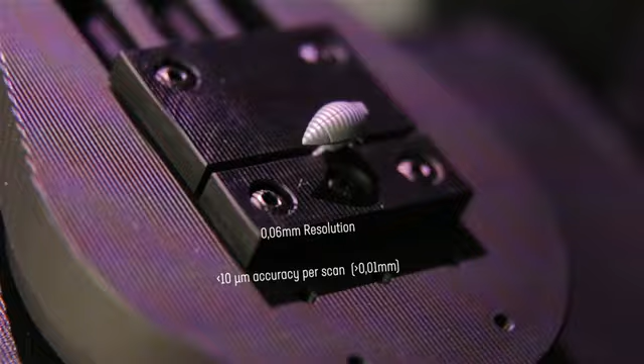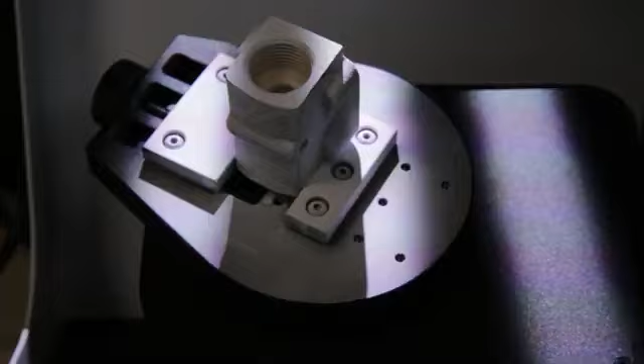So this scanner and most other 3D scanners work by having two cameras and a projector. The projector will project a light on the object, a really tiny pattern, and two cameras will see that pattern and create a depth image.

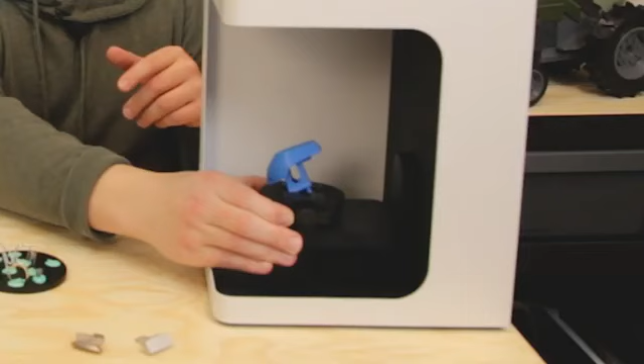If you want to know more about how that works, I have an article written down below that I'm going to link to if you want to read up on exactly how a 3D scanner works. But basically it creates a depth image from one side of the object, and what's really unique about this machine is that it rotates the object for you. So it can rotate the object in two axes, which really helps to cover the whole area of the scan, minimizing the amount of matching and work you have to do around it.

So it's a really easy scanner, usability wise, at least on the hardware. But if we start to talk a little bit about the software, I'm going to show you all the steps on this scanner. You can check out the timeline down below if you want to jump ahead a little bit. But we're going to start off with the software.

As of January 2021, when I'm recording this, the software is not really super good. It has all the features that you need, but they are not really well explained, and the flow of the scanning can be quite difficult to understand. There aren't really any good guides. You get this paper and there's a PDF with the flow, but it's not really good enough, so I'm going to show you the complete flow.

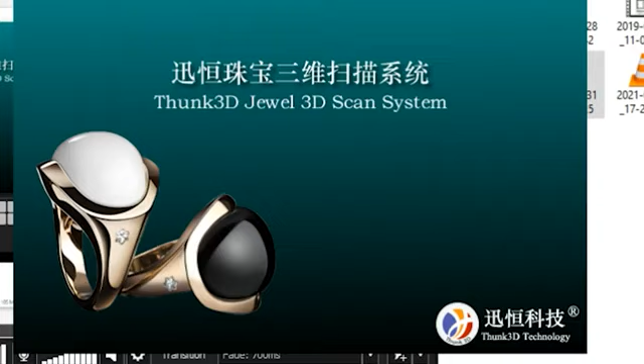So the first thing you do when you start up the software is to turn on the power button. When you then actually turn on the software, the scanner will home itself, so it will zero out any axis. In the software, you see we have a full menu up here. It's very confusing, or it could be.

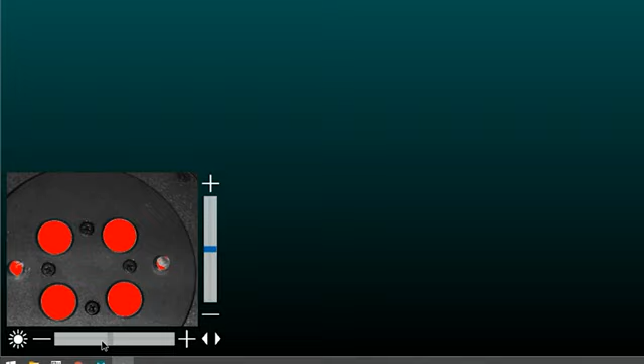On the left, you have a preview of one of the cameras. You can see my fingers there. Down here we have exposure, the camera exposure, which we will use a lot. You can see if I change that, everything will get brighter, and everything that's red is overexposed. On the right side, we have a height of our cutout plane. We'll explain that a bit later on.

On top, you have new project, calibrate, and settings. In settings, these are basically the mesh settings, so not much to do here. We can change all of these as soon as we do anything. Lastly, you have help, and yeah, you can find some information there, but that doesn't really say a lot.

Okay, so the first thing you want to do when you start up the software, and basically whenever you want to scan, I would recommend that you always do a calibration. So you click on that and you have to put in your calibration plate. I'm guessing mine is 5mm, pretty sure it is. And then you put your calibration plate inside the machine. It has these magnets, so it will only lock into one position, like so.

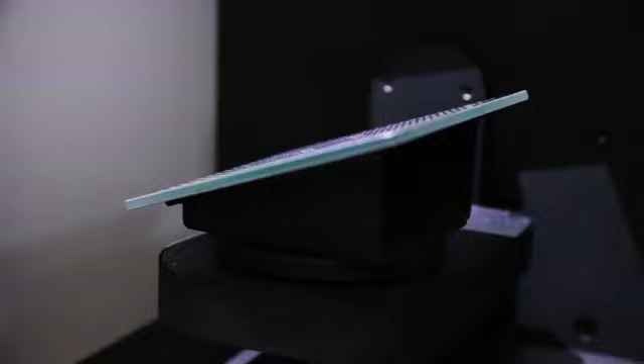Right now the projector is not lit, that's why we're not really seeing this. But as soon as we click apply on calibration, the scanner will look at these patterns. You can see these crosses, so it detects every motion, which means it's tracking its motors, verifying that the cameras are looking and focusing on the same points, and that basically all the math is correct. And then we're done.

So we can see our accuracy value, 0.01 millimeters. It's even more extreme than that.

Then we can choose HD scan or fast scan. Basically, this is how much data you're getting. So maybe you want to do a fast scan to see that you can reach all the areas, but I would always go for an HD scan, I think that's much better. Then when we're done with that, before you click continue, we'll have to name it to something.

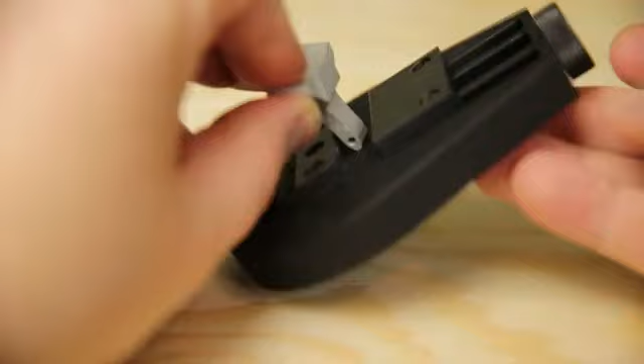Let's go with test. So after removing the calibration plate, you of course have to secure your part before we can click continue. So basically get your part in and make sure that it's secured correctly. When you're happy with that, you have to check the exposure.

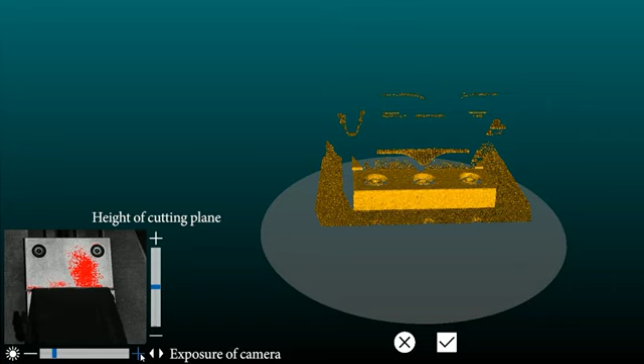As you can see here, it's very sensitive and very good for light objects. As soon as you want to start scanning darker objects, you have to adjust the exposure on the left side. The thing is, the darker you scan, the more noise you'll get from the camera, so try to always use something bright or scan something bright.

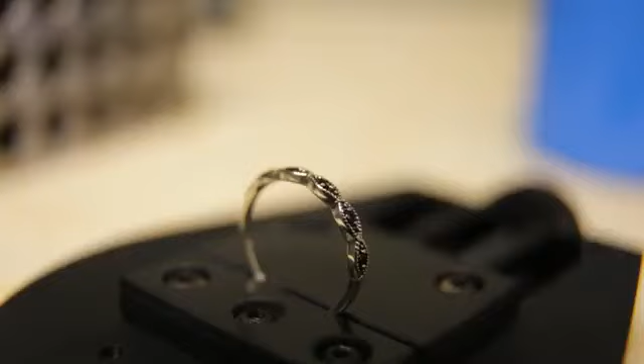You can always use a contrast spray like this AESUB spray. I have those linked down below as well, but this scanner is so accurate that you can actually detect the spray. So if you have some super exact items and spray this on, you're going to get a tiny filler effect. So if you have tiny details and want to scan them, the spray will actually work as a filler, which is not what you want.

So when you then click scan, the scanner will do a pre-programmed path. It's going to rotate in two axes, trying to figure out all the best positions to scan and get as much data as possible. Usually it does a really good job of this, but sometimes you can feel like there are areas where you want to fill in a little extra. This scanner also fills any holes, so the more you can fill in yourself, the better it's going to be in later stages.

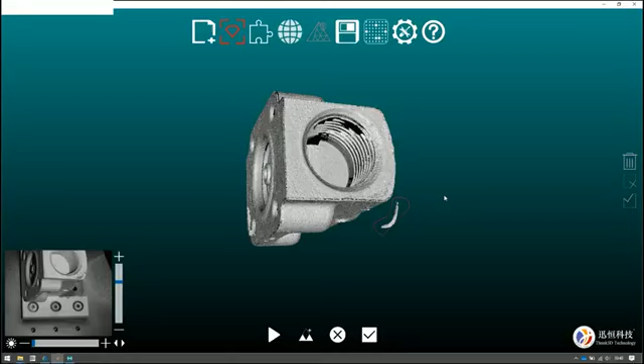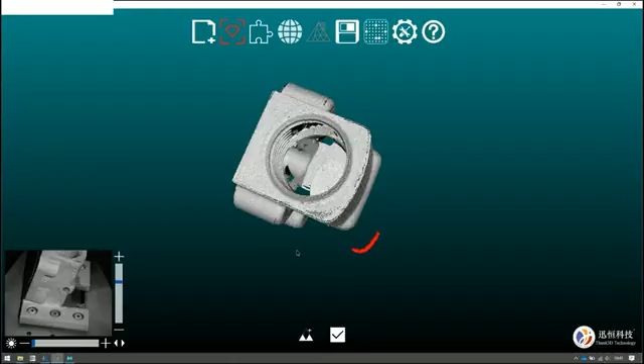What's really cool with this scanner compared to a lot of different scanners is that you can actually click on this button that lets you add a scan, and when you do that, it will actually lock the camera around your 3D object. So when we're looking inside the software, figuring out what angle we want to see more from, the software will actually track that back to the camera movement. So if I click add scan from this camera angle, it will move the object to the corresponding angle for the cameras and the object in the real world, and actually scan from that angle.

This means it's super easy for you to figure out what areas are missing data, then zoom in on those and add a scan. You can keep adding scans until you're happy, and then when you finish off, it will register a bit, doing some thinking behind the scenes to figure out exactly all the images.

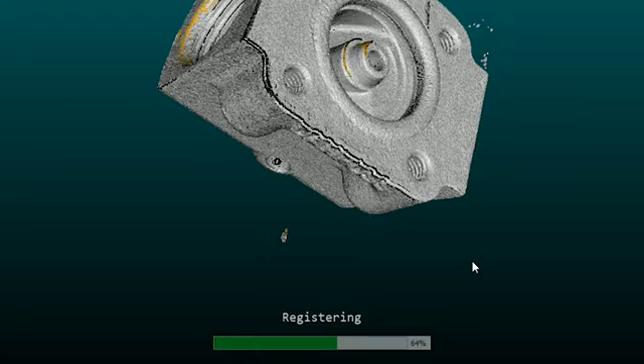What you want to do next is really important, and that's to remove anything you don't want. So you're just going to use a lasso tool to remove the mesh. Because then, if you want, you can add a different scan, for example turning the object around. That really works well if you have something unique and trackable, not something that's symmetrical—like a ring can be very difficult to turn around.

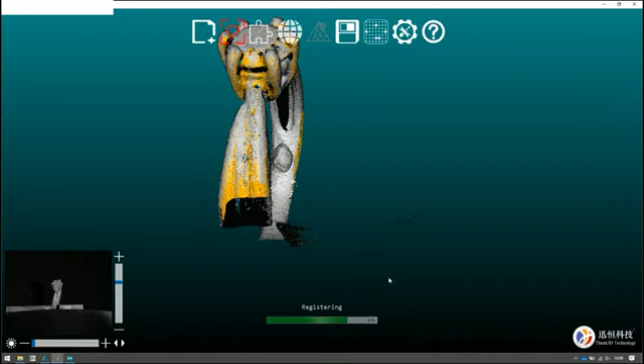You can see on one of these rings I've added a little bit of clay to make sure I know which side is which. So if you want to turn your model around, all you have to do is scan as regular, check out your model, add some scans if you need to, and remove any unwanted mesh.

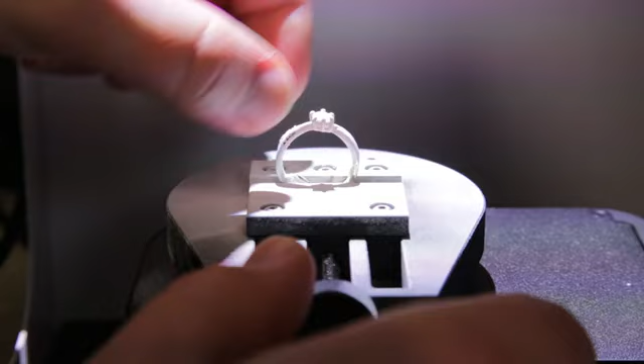Then you have to turn the physical ring around, of course. It can be quite tricky, especially with coated metals. You can see that the ring loses its powder a bit.

Then you do another scan, you just click continue scan. It's all sped up here to save some time. And of course, remove any unwanted mesh that you don't want.

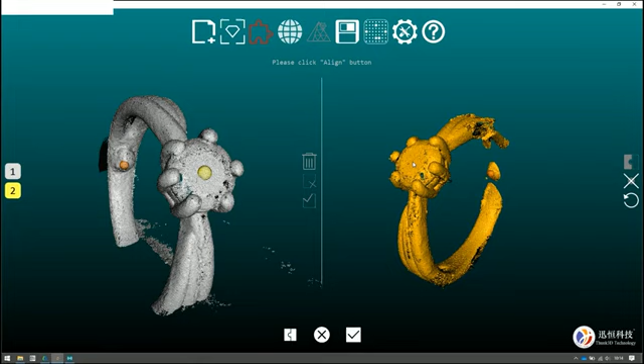In this phase, you will have two different scans, and then you match them up with different points. You can see I'm clicking out orange points, yellow points, and there should be a green point as well. Basically, you align these points, and the computer will help you find alignment. As you can see here, three points is all you need, and they are aligned.

So when you're happy with all that and you have cleaned up the model, it's time to mesh the model. So all these dots that we're looking at, that's only a point cloud. It's so much data that we have to make a mesh out of it. Or we don't have to, but we can make a mesh out of it.

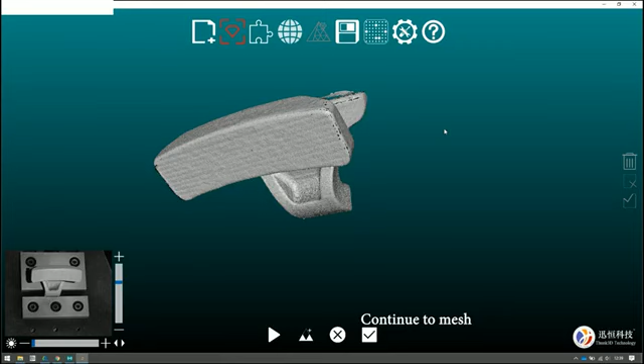So the meshing tool is kind of simple. You have some settings, but to be honest, I haven't really seen a lot of difference depending on what settings we're using. Keep as much detail as possible, because when you export this model, you can do all the final retouch and smoothing and all that.

And speaking of export, when you mesh it, it will actually save the STL file. So you don't have to save a lot of things, it does that for you.

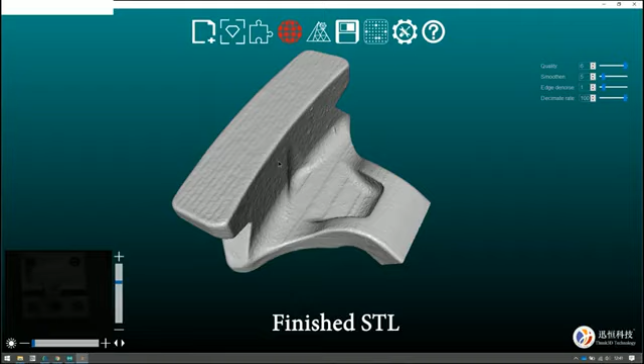What's really good, especially if something would crash, which I've had one time for like 40 scans, so it's not often that it crashes, but it had happened. What's really good about that is if you're really into 3D scanning and you have all the software to take out individual point clouds and do your own point cloud alignment, this scanner will actually record each image and allow you to see it. Even if the software crashes, up to that point during the scanning, you will have data. So you can always kind of recover that if you want to.

Okay, so to test this scanner, I really wanted to reach out to local jewelers. I tried, but it was really difficult, especially during COVID, to get someone to come over with some designs. Because this scanner is made for jewelry parts, even though it works really great for mechanical parts too. It's kind of designed to be simple, easy to use for designers to record their jewelry pieces, to make copies or make changes.

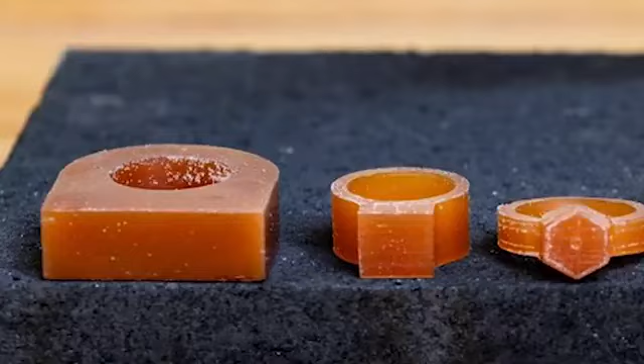And what I really wanted to test was to take these pre-made or pre-cast models. So we're talking handmade jewelry designs, made by a very skilled artist. Because these designs are very difficult to reproduce. Maybe if you have some failure during casting, maybe you want to do larger scale production with 3D printing, maybe you want to do something else with the design, or even just record it to have it saved. A 3D model would be so much better than a photo of the design.

I wanted to try this scanner on those kind of parts, but unfortunately I couldn't get hold of a designer that would work with me. So that kind of material is kind of matte, kind of wax-like. I don't have anything that represents it perfectly, but I do have these Warhammer 40K plastic parts that I think are fairly similar to some of the harder wax models.

So we are going to test it with those, of course, but also with real rings, something that works and is already made. So for example, if you want to make copies of this ring, how well will the scanner work? But we're not only going to test that, we're going to do a lot more of the mechanical parts later on. But I really wanted to show you how this ring capture multi-scan kind of works. So let's check out that first.

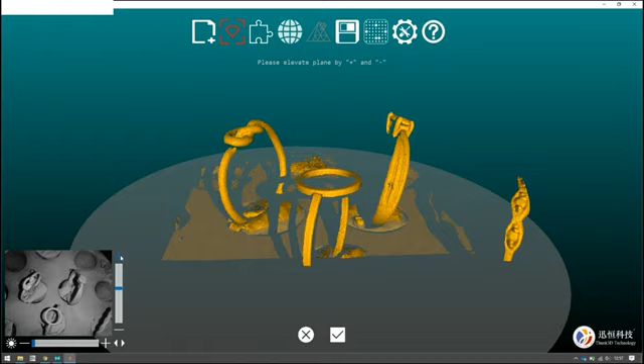So the first thing you want to do is, of course, to get your parts on this multi-scanning plate. By the way, all of these plates are interchangeable, so they position into the scanner really well. So you put a lot of objects here. You then select a new project, you do the multi-scan, and you just look at the exposure, make sure it kind of looks well. As you can see, I sprayed these models.

Basically all you have to do is allow the scanner to do its normal procedure, its normal path. You can then add scans from different angles if you want to reach more difficult areas.

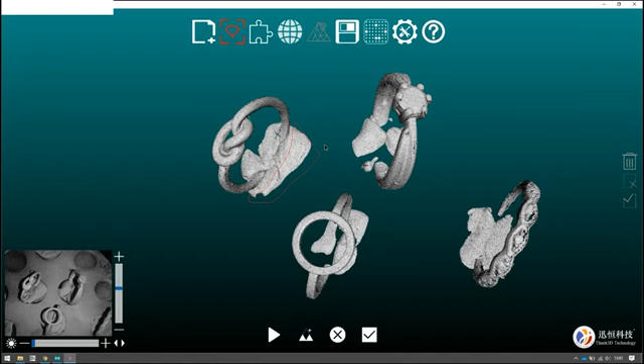In the next step, it's really interesting because you have to clean out each model, so you have to separate them yourself, especially if you accidentally scan some of the plates. Then the machine will treat them as separate STL files.

You can see they're all numbered, and it's really cool because you get separate STL files for each ring that you put in. I guess this is fairly good for jewelry design, especially if you have a lot of different concept designs you want to record. I think it might be even better for dental scans, so if you have a different setup of teeth, that would work really well too.

For the rings, you get better precision and more opportunities to do dual scans if you do it in a single scan mode. I think it's much easier to do a single scan, but you have the multi-scan option if you want to use it.

All right, so I've talked about the jewelry scanning. Let's see some examples. Everything you're going to see is before export, before any type of finishing, so the surface and the mesh, that's what you're going to get.

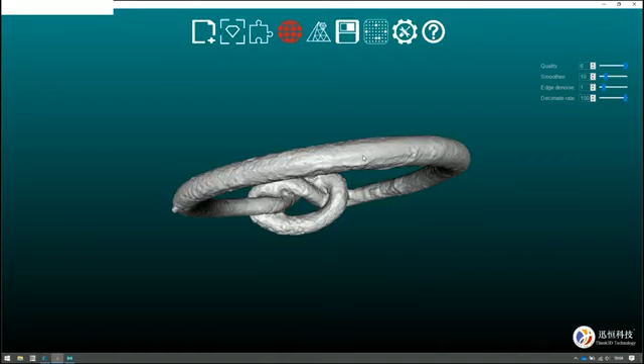As you can see, the result of scanning some of these rings, even this knot ring that is super difficult to reach all the areas, the scanner is doing an amazing job of getting all those details from different angles. Not to mention the paper clips—I mean, how is that even possible?

We can measure the thickness of the wire in the paper clip. That still amazes me. It's really cool that we can see those details.

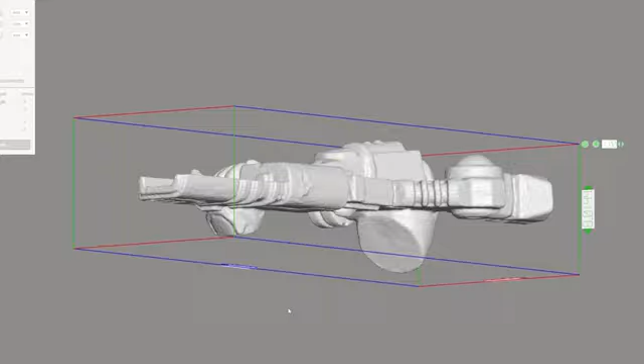And again, with the Warhammer figurines, it's super detailed. It's something that I'm very happy with.

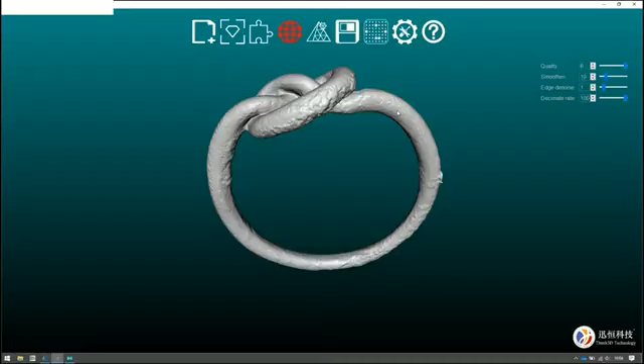Okay, so enough about that. Let's talk about the post-processing, because as I mentioned, some of these mesh files are good but not perfect. Looking at this ring, for example, it's not a perfect scan—we have some noise, the spray didn't make a perfect job.

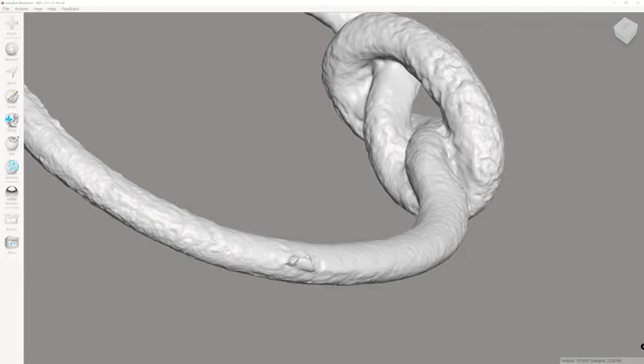So if we import this into Autodesk Meshmixer, which is a free program, you can see here we have actually 1.1 million vertices and 2 million triangles, so this is a lot of mesh data. But you see this part here, we kind of want to smoothen that out, among other things.

So we can use some tools in here, brush tools—we've got bubble smooth, shrink smooth, robust smooth. I'm just going to try a few different ones here. Usually you need to increase the strength and maybe even the size, but you can see we're starting to sculpt here a little bit.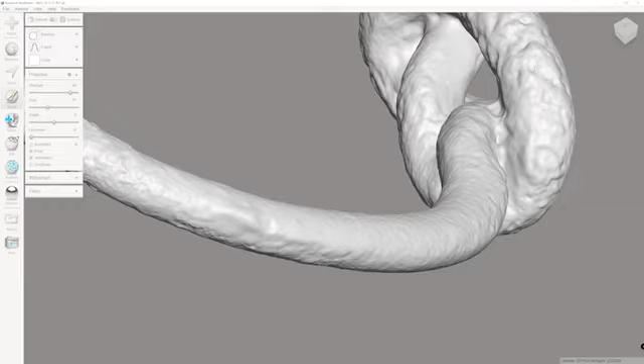This is something you can spend forever on, so it's totally up to you how much you want to post-process, but if you were to make a proper copy, you would probably have to spend some time just smoothing things out. But it does take a while.

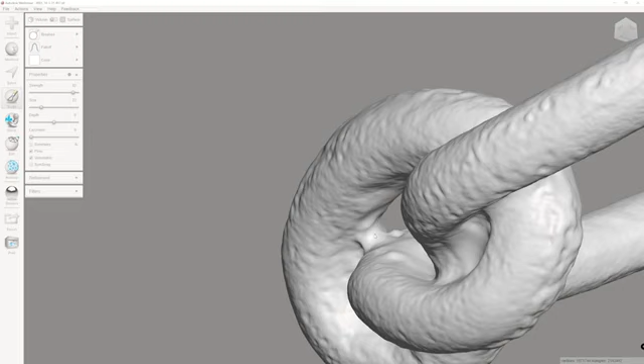You can also use precision pencils and brushes to refine details. You can see in here we're refining some details, making the joint between the two strings much better. You can see here we have some overfill, where the scanner filled a lot of holes, so by reducing that a bit we can make the transition look better.

But yeah, you can actually do so much more. So if you want to modify your item—I'm not a jewelry designer, but you can see I'm trying to make some extra sculpting flat thing here. Again, this is a profession by itself, but you might want to check it out.

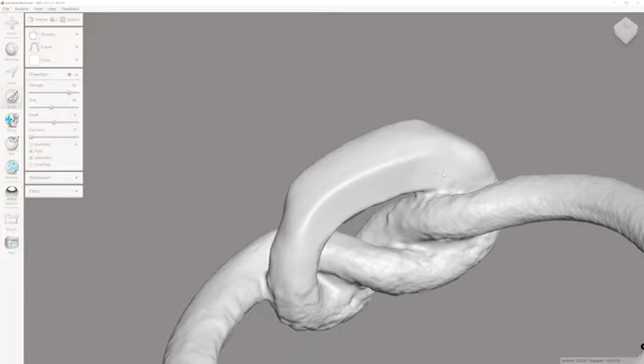You can use Meshmixer because it's free and very easy to get started with, but there's plenty of other software.

Talking about post-processing, that's a really good transition to what the heck are you going to do with these models? Why are you scanning jewelry models?

I see great potential for jewelry designers and other designers to actually record what they're doing. Their handcrafted work can be enhanced in the computer, or digitally restored, or just digitally archived in a 3D file instead of doing the design, casting it, and then having nothing left. So for anyone buying a scanner like this to scan jewelry, expect to do some post-processing by sculpting, smoothing out, or refurbishing some of the details that you can't reach before you print it or something like that.

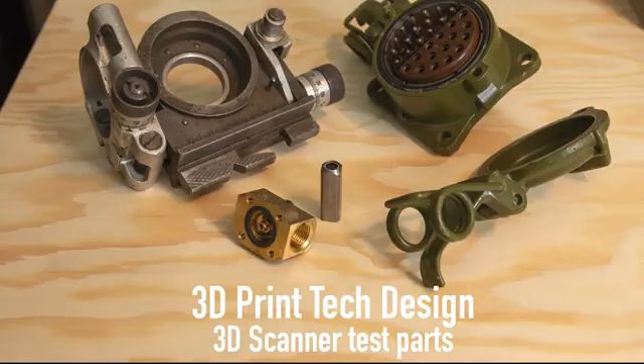Since this scanner is so freaking accurate and detailed, what other kinds of applications can we use it for? I'm going to do some scanning of mechanical parts, prints that I have, and a bunch of random items. I'm also introducing a concept here on 3D Print Tech Design, basically scanning controlled parts. I have a tiny valve, and I thought maybe we can scan that with this machine, and it went really well. I also bought a 123 block, a really highly machined, high accuracy part, but unfortunately it's too big and too heavy to scan with this scanner, so we'll have to use other types of measuring parts. To be honest, I can't really verify the millimeter accuracy, but it seems like it's handling it very well. So let me show you some scanning of different parts and let's talk about the results.

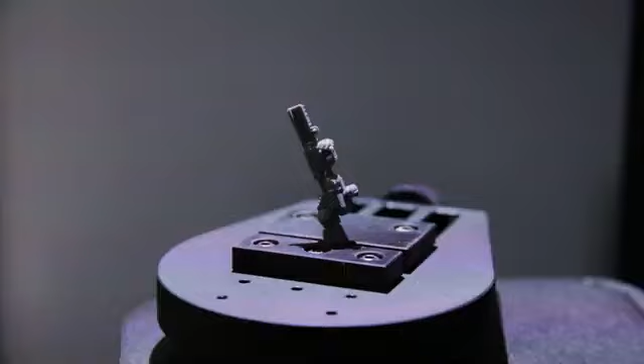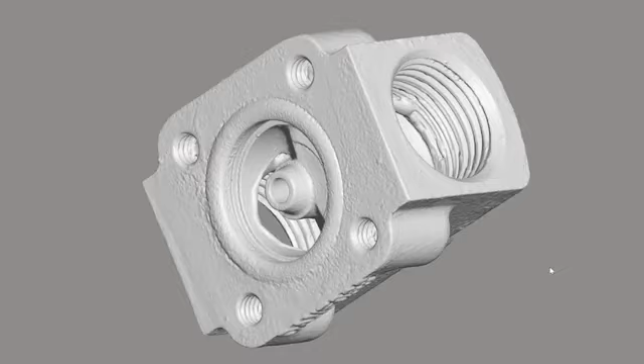It's so cool to be able to scan a Warhammer weapon. It's so tiny, it's incredible. This part, for example, we'll use a little bit later, but it's super precise and you get really sharp corners. Here you can see the weapon, look at that mesh, that is super tiny. And the paperclip is also crazy. This calibration part came out really well. We'll talk more about that in a second.

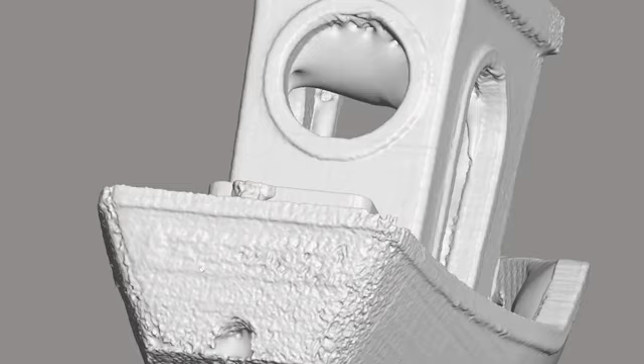What I find really interesting is this 3D Benchy. This is not sprayed, so it's uncoated with some reflecting material, really difficult to scan. We can't really see the text underneath, it's not visible on the print either, but we can see all the layer shifts, the layer lines, ghosting. We can actually detect each 0.2mm layer, so you can see here all those layers, and yeah, we can see some on the top as well. I think it's super precise, look at that, you can even see the depth. You could probably measure all this if you want to. Yeah, look at those layer lines.

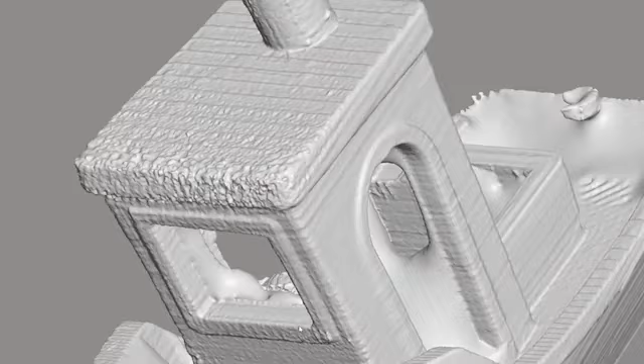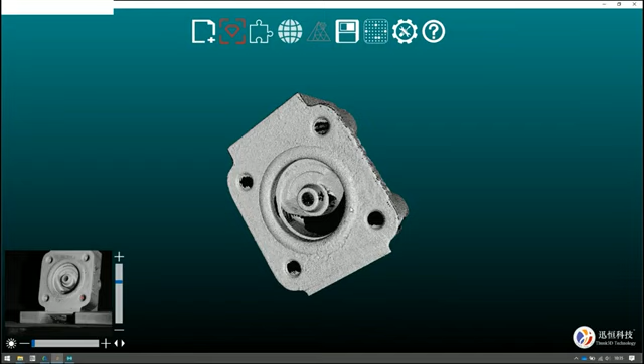When scanning this test part, it's really interesting to see how we can actually reach into very far areas, because the cameras are pretty far away from the object, so they can look kind of far into different holes. Having the add scan mode, where I aligned my camera view and tried to reach extra areas, this scan went really, really well. I'm kind of amazed how well we could reach into all the different holes. It's kind of interesting because this scanner has such high precision.

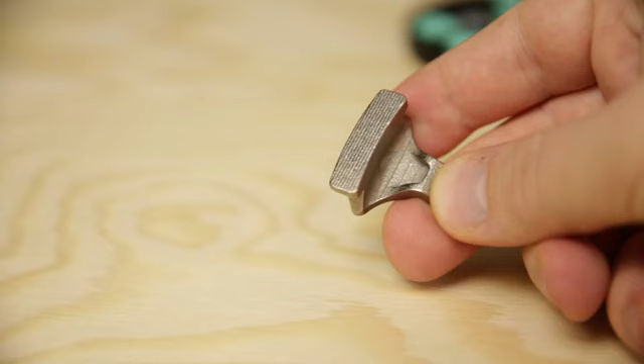These two products that I designed and had manufactured, this is the prototype state of the products. I actually had this machined—this one is CNC machined, and this one is 3D printed in metal, in Titanium. As some of you know, metal printing can be kind of difficult, usually there's a lot of warping in that. I'm scanning those parts to verify how well they are produced, because in my CAD file everything is perfect, but how did they actually manufacture it?

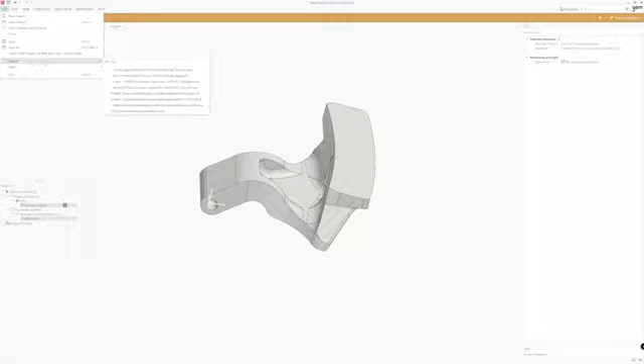Using this free GOM Inspect software, I can load up my original CAD file, the perfect CAD model so to say, and then we can also import our mesh. You can see I have already pre-aligned them, but you can do that in this software as well. So if we then run an inspection deviation analysis, a surface comparison on the actual part—I think that's what it's called.

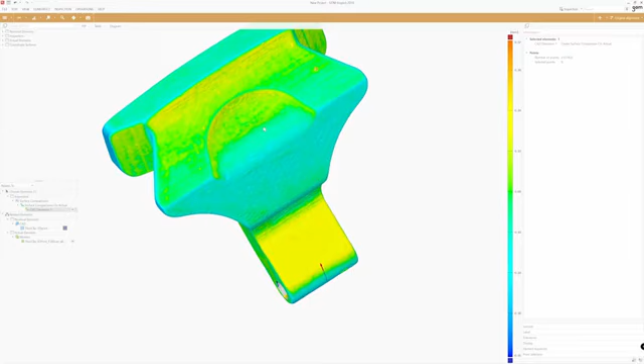We can use some standard settings, 2mm maximum distance for comparing, and we get this really cool model. This is a colored deviation map, so red and super blue are two opposite deviations. Around green is 0, and then we have up to 0.2 on the yellow parts.

We can also point out some particular spots if we're interested to check those out. You can see the deviation is here. It's actually quite a lot for being 3D printed.

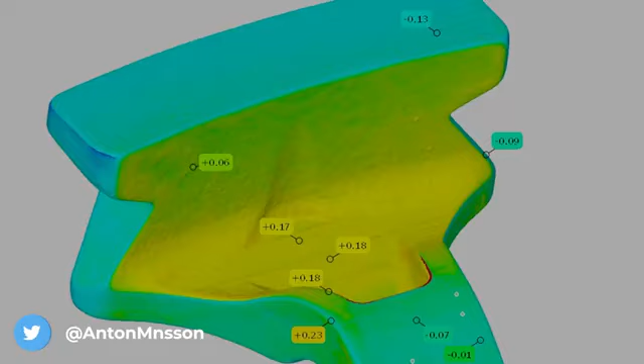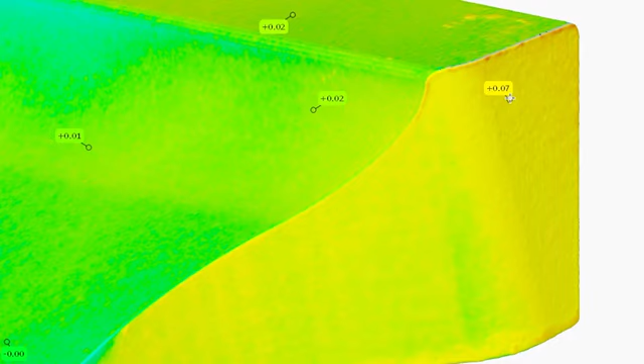So looking at the CNC version, doing the same with the mesh, also scanned of course. In this CAD analysis, it's very interesting because using the same settings, it looks much more green and yellow, but even the scale is different. At the yellow stages, we're only talking 0.05mm off, so it's way more precise than the 3D printed part. Even at the bad areas, the red area, it's only like 0.1mm.

With this software you can do some really cool color graphs and PDFs with reports on how things work, and it's something that I find really cool to be able to do with this scanner.

So conclusion time. Again, Thunk3D delivers really good 3D scanners hardware-wise for the amount of money, especially compared to competitors that are many times more expensive. But they do lack some of the usability, the user friendliness, and the user interface. I've said it before and I'll say it again, I wish that they would spend more time on the software, making all the icons actually work, making it logical, with a good step-by-step guide. Hardware-wise, it's very robust, it's very firm. I'm not afraid of bouncing it, and it's very strong with the motors and all that.

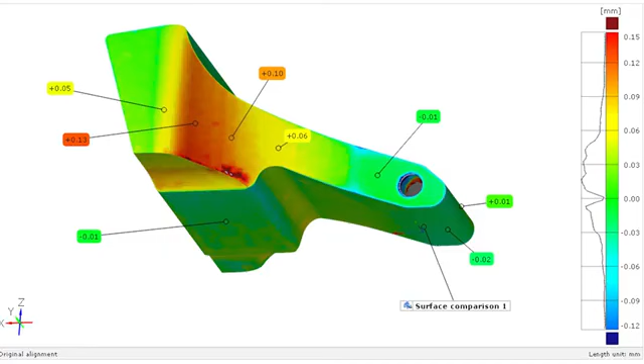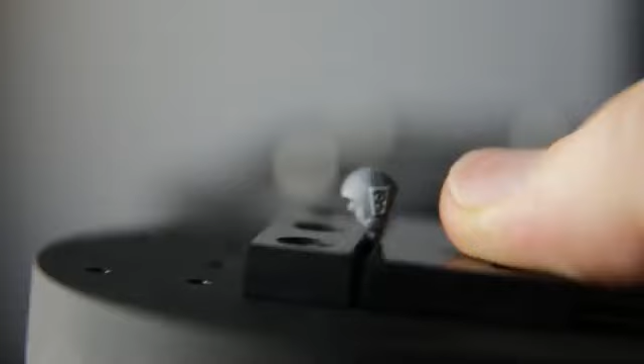But the results are beyond what I've ever tried before. The level of accuracy that you can get is just insane. For example, the Warhammer head, what is that, like a few millimeters wide? And it still captures everything that is less than a millimeter. I can see the tiny camera lens on his head, and it's less than a millimeter wide, and we still have enough data to actually do some useful stuff with it. It's not like 1 pixel, it's a lot of data, and it's really impressive.

The paper clips, I mean, come on. You can 3D scan a paper clip. That's super impressive. And speaking of deviation and accuracy, unfortunately, it's not something I can verify or test. On the parts that I've been able to measure with my manual caliper, it seems to be spot on. But again, I can't verify it because I don't have the tools to do so. It looks like it's correct.

So if you're looking to digitalize small objects, mechanical, jewelry, design, product testing, whatever it is, this is a good scanner to do that. Just remember that the volume is very small. There's no way to really be able to scan larger than the volume. You have to have another scanner for that.

But also be prepared that you have to do some post-processing to really smoothen out some of the issues, especially if you don't use the scanning spray, you get some noise in some of the models. That's very easy to just smooth out in a post-processing software.